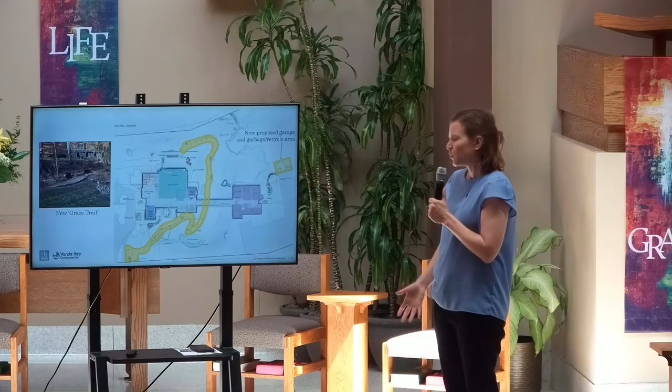And then the next part is the new Grace Trail that's highlighted in yellow on the plan. This area is to help increase welcome and accessibility to our ravine space. So the Grace Trail is outlined in this dashed line, how it would run through our property. The goal really is to increase accessibility throughout the whole site so people feel welcome to our beautiful grounds and can really be invited in.

So the Grace Trail would start by our existing entry sign, and it would wind down, and the trail would be resurfaced to be a stabilized granite surface so it's accessible, so people can have a smooth surface to enter our ravine space. So the trail would start and wind down past the Memorial Garden, and with the Grace Trail, there's going to be 5 alcove spaces for people to stop and reflect as they move through the trail.

So the first stop is the Gratitude Alcove. And with each of these alcoves, there's going to be an Aldo Leopold style bench and a sign that explains what that restful purpose is along that stop. So you'd start with Gratitude and then wind your way down past our Boy Scout Council Ring. You'd enter the ravine and go north here. The next stop would be Release and then Acceptance. And then you would wind.

Right now we have an existing staircase of timbers, and they're definitely at the end of their usable life. So we're going to propose new stairs there. Those new stairs would have stabilized landings, so it's easier for people to access and come up that hill. So the Challenge alcove would be tucked in along that stairway in the hillside.

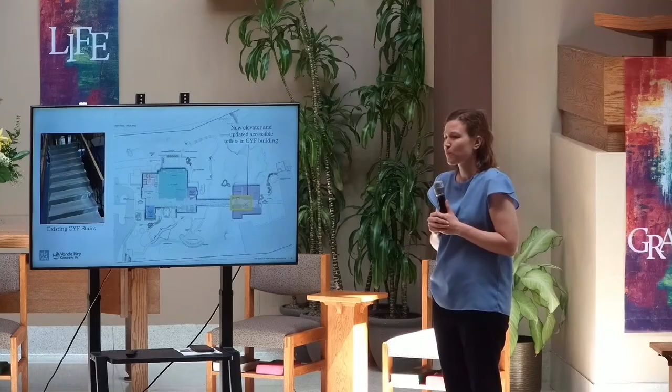The improvements to accessibility within the building are also part of this level 1, $2 million campaign. I think we heard very loud and clear that accessibility is critical here, and at this point, the CYF building across the ravine is not accessible. Once you come into that building, if you wanted to come to this building, you would have to navigate a set of stairs. So as part of the level 1 campaign, we're proposing a new elevator in the CYF building, as well as improvements to both bathrooms on the upper and lower levels.

You can sort of see the arrows moving around on the screen perhaps. What this is showing is that if you were to come in, we would be taking a small bit of that classroom on the upper level to provide the elevator space needed. You could go into that elevator, it would have doors on 2 sides, so that you could go in, go down half a flight, and you'd be at the bridge level, and you could head over to this building. Or you could go all the way down and access the lower level as well.

Both of the bathrooms on the upper and lower level are sized such that we don't need to take the surrounding walls of those bathrooms out to make them accessible. We just need to reconfigure the stalls and the different plumbing fixtures that are provided. So this is really a wonderful opportunity to create excellent accessibility in that building.

In addition to that, a few of the other commitments in this phase of giving would be upgraded HVAC in the CYF building, which is currently out of date, and an updated electrical panel. This is a critical need of the church that would be part of this level 1 campaign. And then all of the improvements to accessibility that we've talked about.

Next, we're going to talk about the level 2, $3 million campaign. So in the level 2, $3 million campaign, it's everything we just talked about. So you can sort of start to imagine these as building on top of each other. So within level 2, everything we just discussed is part of it. But now we're going to build on top with more investment.

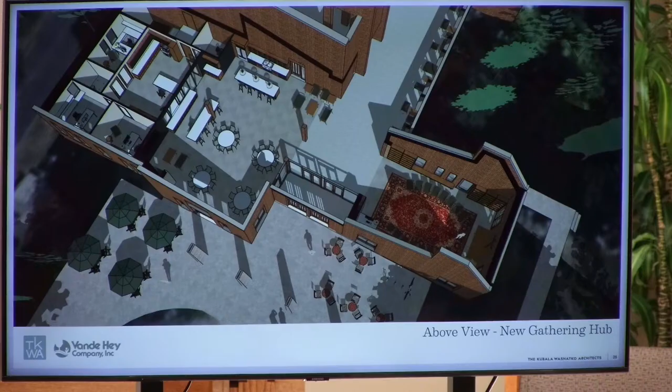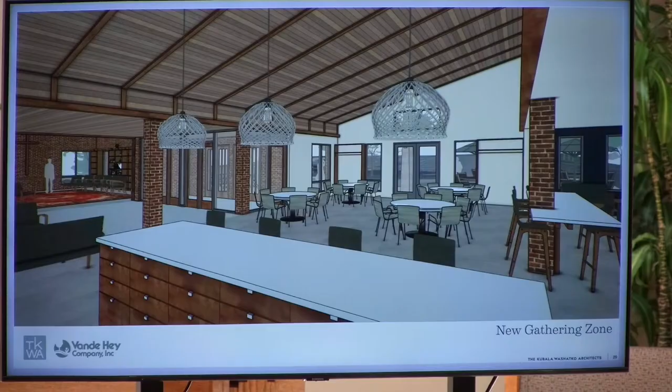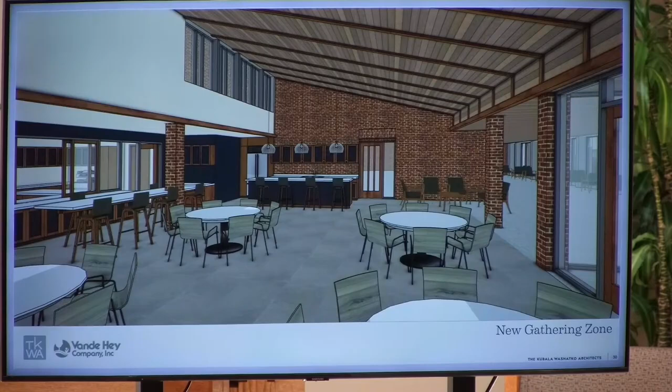You're seeing now the wonderful shaped roofs that you have in this building and the opportunity for clerestories, those high windows which let light in. So we really see this as being a wonderfully daylit space. We're seeing in this image a proposed new door, roughly not quite by the booth back there, but there would be another connection point so that people could flow more easily in and out between the gathering zone and the worship.

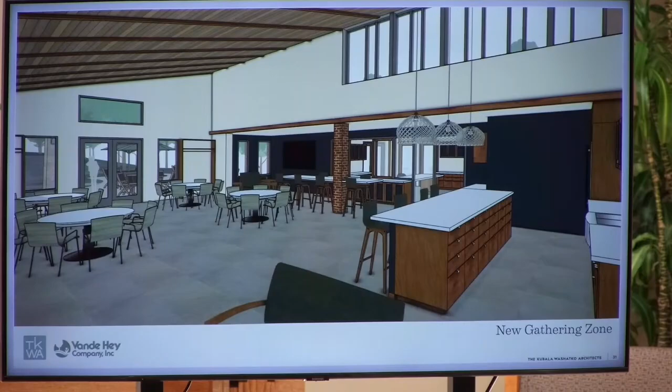And now we've turned, and now you're seeing beyond would be that administrative area, still highly visible, highly welcoming. And you're also seeing the kitchenette off to the side. So this would be a very flexible space. We all know that people like to gather in kitchens and come together in kitchens. And so having a place like this for everybody to gather around and meet is, I think, a really wonderful opportunity.

Next, we're going to talk about the level 3, $3.5 million campaign. So again, it's everything in level 1. It's all the accessibility we talked about. It's everything in level 2. It's all of the communal spaces that we've talked about. And now we're stepping out to that welcoming zone. So we're going to go out to the front entry and talk about a new canopy and landscape. And again, we're increasing the commitment to missions and increasing our commitment to maintenance with this tiered structure.

I went the wrong way.

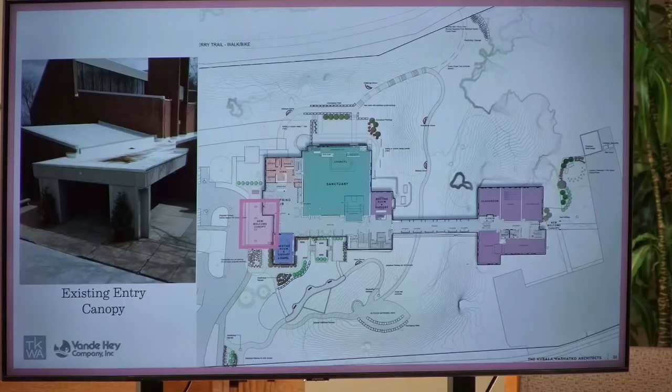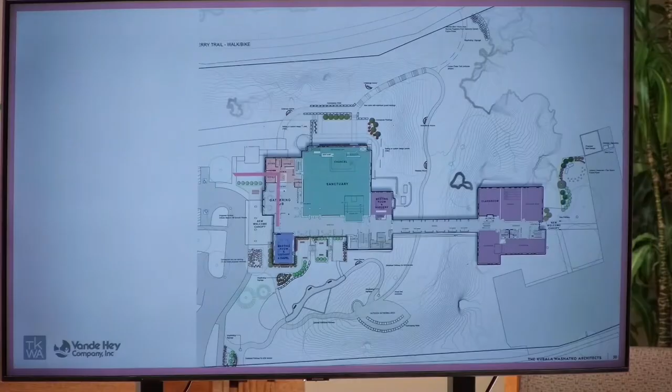This view is beginning to show you the relationship of that canopy to the gathering hub we just talked about. So you're seeing some new doors, which would make those strong connections between the gathering hub and these outdoor welcoming zones. And the landscape in this area really is just supporting that architecture to help create that welcome feel and the aesthetics of the new canopy area. So proposing a new paver surface to make that welcome feel and help soften the space with some additional plantings and really help emphasize the welcome feeling with the canopy.

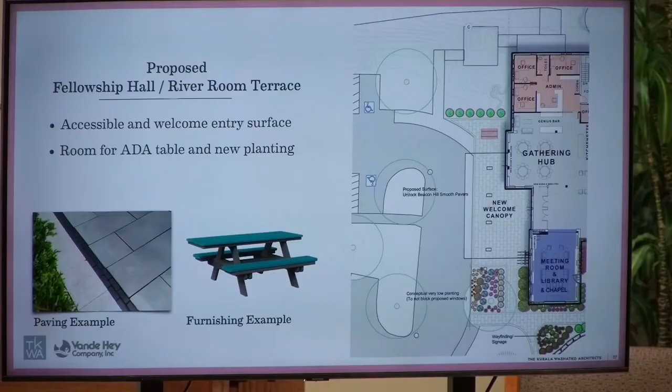I think the location of all of the places that we've just talked about are really key. When you're connecting with people, I think we all have that feeling of you're walking and then maybe you stop there and then you keep talking and then maybe you stop just outside. And so having these places that make lingering and conversation comfortable along these paths between worship and wherever we're heading next are really key to making sure that this place continues to become more useful to more people more of the time.

The final level that we'll talk about today is the level 4, $4 million campaign. Again, we're including everything we talked about in level 1 with accessibility, everything in level 2 with gathering, everything in level 3 with welcoming. And now we're going to be talking about additional opportunities to touch other places within the church. Within the interior, we focused on the needs within your worship space. Additional outdoor areas for classroom space. And again, we're increasing our commitment to missions and increasing the commitment to maintenance.

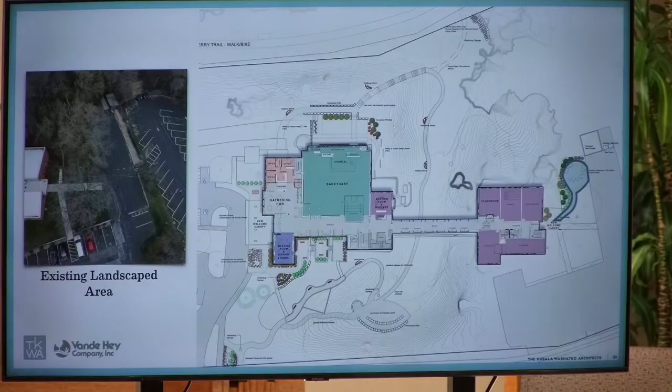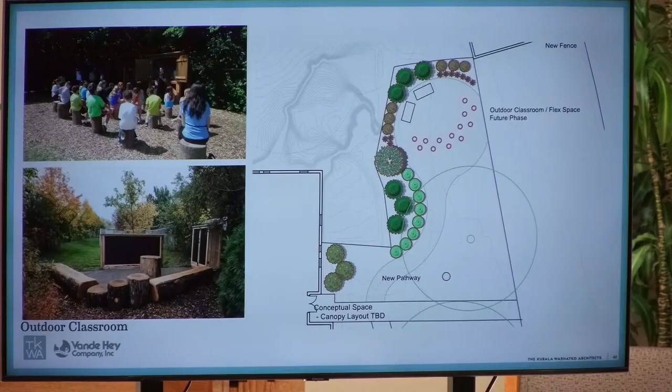So this section highlighted here would be the location of the outdoor classroom. We're calling that an outdoor classroom, but really that's another multifunctional space that could be used for large or small groups. And so that gives you an idea of what that would look like, just an informal gathering space for many different groups of people to use. And we're hoping that this is also surrounded by a planting that a community would take on, and it could maybe be a learning garden or a community garden, or culturally significant to whoever wants to contribute to that planting in this space.

And then the last part of the landscape in level 4 is re-envisioning our main entry sign. So that gives an idea of what that would look like, and then to help make it feel welcome and bright and more cheerful, welcoming people, we'd add some plantings surrounding that new sign.

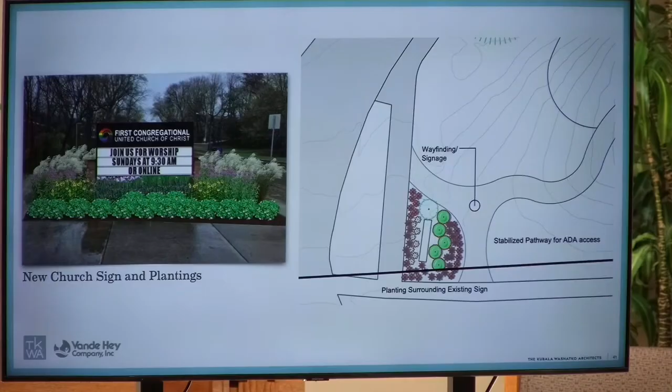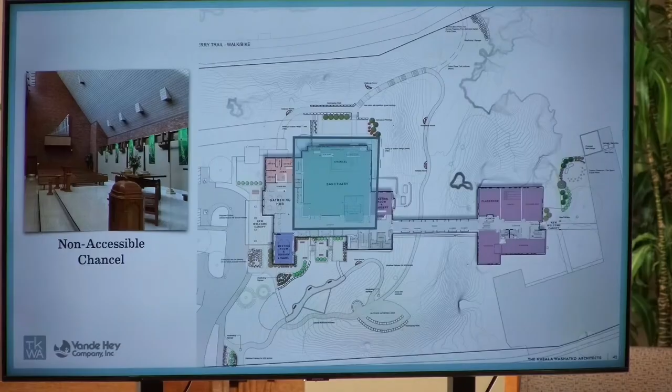On the interior of the improvements for this phase, I think this phase is really starting to hone in around gathering and learning and worship. And so as we talked about the exterior space, now for this space, there are a few needs that we are aware of. First of all, I'm standing on the chancel, which is not accessible today. This is something that we can be considering to improve.

I'm going to put on the screen another church project we recently completed where we were able to incorporate just a small accessible ramp. That's being proposed just behind me on this side, where we can include the ability for anyone with any mobility issues to be able to come up on the stage comfortably.

A few other items that we would be considering addressing in this phase when we think about maintenance requirements and capital improvements is the window right above me. I'm fortunately not in the glare right now, but I know that's not always the case for some of those who are up on the chancel during worship services.

The windows, many of these high clerestory windows in the building, are original and do require replacement. So when we think about replacing this, we could address some of the needs to make this more translucent. We still think having daylight come in is really important, but the ability to not have sun in someone's eyes when they're trying to look out, I think is a really wonderful opportunity for us to mend that.

We also would have in this budget the opportunity to add acoustical panels to the space. Church worship spaces in particular are very interesting to think about when we talk about acoustics, because you have both the need for the spoken word and you have the need for music. And those have very different interests when it comes to what we call reverberation, which is the fullness, which is why you can hear my voice sort of bounces a little bit. That's wonderful for music, but it makes it hard for people to understand what people are saying sometimes.

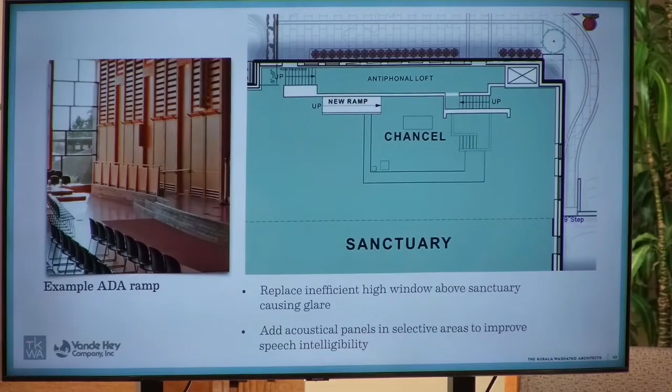We covered a lot, but we are here for questions. We can certainly go back to any of the images that we presented, but we hope that this has helped you envision and understand what some of the priorities that we've heard from your congregation are. And we certainly thank you for your time and your attendance and all of your listening today.

This is all for me very, very exciting. And I think you've done a spectacular job of hearing what the needs are and trying to propose things, particularly with respect to accessibility. I date back to before this building was built. And you're quite right, accessibility was not an issue at the time that this building was built. The one thing I'm a little bit concerned about in the plans that you have is that we seem to be significantly eroding the space available for pastoral offices and the administrative function. And I wonder if you could speak a little bit to that need and maybe persuade me that what appears to be a significant reduction is something that the congregation is able to function properly with.